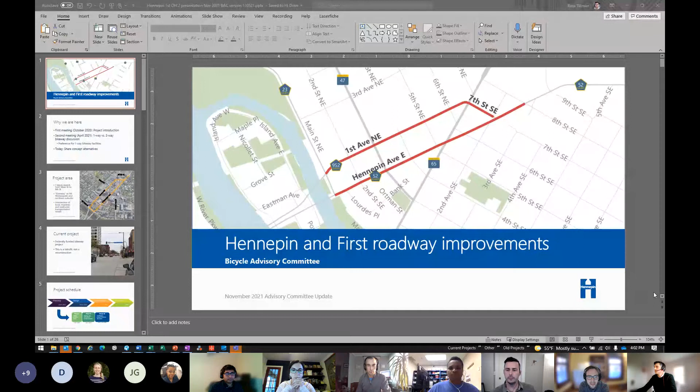Good evening, everyone. My name is Luke Hansen, Transportation Planner with Minneapolis Public Works. We're here tonight with a presentation on the Hennepin First Roadway Improvement Project, led by Hennepin County. We'll be presenting information on a couple of corridor concepts at the 15%-ish range. We're not requesting a formal resolution, but are open to one, should the group have a preference or opinion they'd wish to articulate. With respect to time, I'll hand things over to Josh, who joined from the county.

Thanks, Luke. Good afternoon, everyone. My name is Josh Potter, Transportation Project Manager with Hennepin County, county lead for this Hennepin and First Roadway Improvements Project. I'll kick it off to the Bolton and Menk team here. Ross, why don't you go ahead? Good afternoon, everybody. My name is Ross Tillman with Bolton and Menk, and with me I've got Cody Christensen with Bolton and Menk, as well as Colin Harris with Alta Planning and Design.

Appreciate the time, everybody. I know we've got a tight agenda and a ton of information to share, so I'm going to try to blast through the slides. I know everybody has seen some concepts in advance, so we're looking forward to some conversation afterwards too.

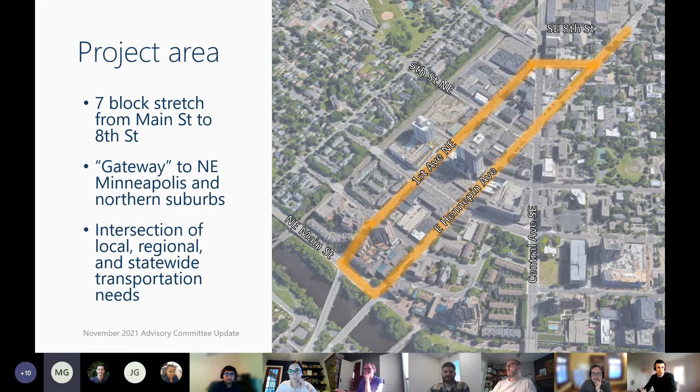Project area, you've seen this slide before, primarily on Hennepin Avenue and First Avenue Northeast between Main Street and 8th Street. This is a little different than before: we added the orange line on Main Street between First and Hennepin. That's where the seam trail connection through the park board is going to be integrated with this project. We've got a slide on that later too.

Just a reminder, the current project is a federally funded bikeway project. The scope was adding a bikeway, replacing signals, ADA upgrades, and curb extensions where feasible as the base scope. This is a retrofit project, not a reconstruction, so for the most part in the concepts you're going to see us trying to save as much infrastructure as we possibly can to fit in the bikeway and make some of these other improvements as well.

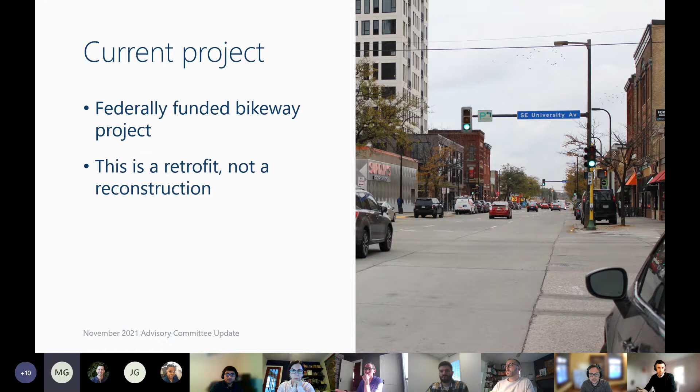Schedule-wise, construction for this project changed from 2023 to 2024. That's now in line with when the E-Line BRT will be implemented through this area. Otherwise, we're currently in phase 2 of our planning effort, sharing concepts. We plan to be back with this group and others in early 2022 with a preferred alternative.

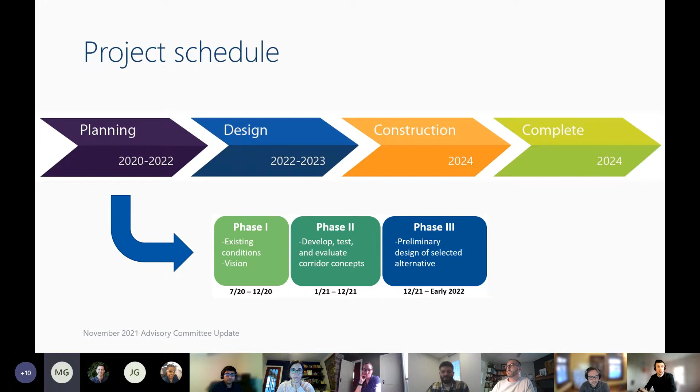Refreshing on project goals, the things we're focusing in on here are really safety and accessibility, multimodal connectivity, supporting land use context of the area and the business district, and then of course active living and environmental health, the bikeway component.

We have a slew of engagement opportunities that we've done so far and that we plan to do as part of this project. We're in the second round of engagement, meeting with advisory committees and neighborhood groups. We have a public open house next week, similar to what we did in the fall and winter of last year. We're getting input on the concepts now, and we plan to come back in early 2022 with that preferred alternative to talk through.

Key things we've heard to date: safety and accessibility, active living and walkability, serving planned growth in the area, and streetscape and public realm improvements are important to people. Of course, the business district and supporting that is important in this area, and then parking needs. So those are the very summarized versions of what we've heard throughout the engagement we've been through to date.

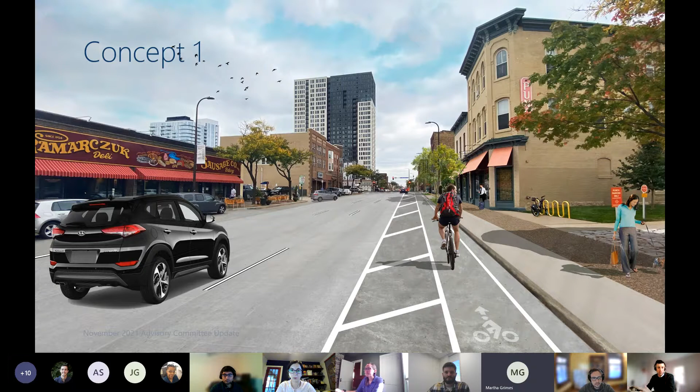Again, this is pretty much in line with what the federal grant had in it, so we wanted to make sure we took that idea and got it on paper in a way that was feasible. This is just a rendering of what that could look like: the three general purpose travel lanes and then the on-street buffered bikeway with the paint buffer.

The second concept is a variation of that, where we're actually repurposing the 3rd travel lane on the road. This concept has 2 general purpose travel lanes, and the right lane becomes a transit lane. There remains 1 parking lane on the left side of each roadway, and 1 protected bike lane taking the place of the parking on the right side. There are a couple instances where that's not the case in the concepts you'll see on the layouts, but for the most part parking is removed on the right.

Each of these concepts does include the seam connection. This is an identified gap in the regional trail network that the park board identified through their planning process. The gap is between First Avenue and Hennepin on Main Street. The idea here is to repurpose - since that's a pretty wide section right now on Main Street - a portion of the shoulder and through lane for the southbound direction to put in a shared use path between First and Hennepin.

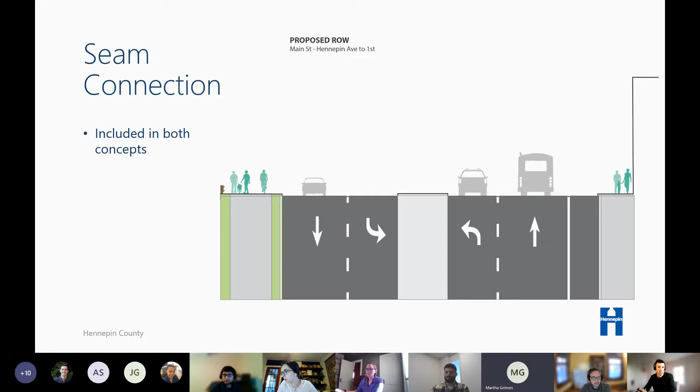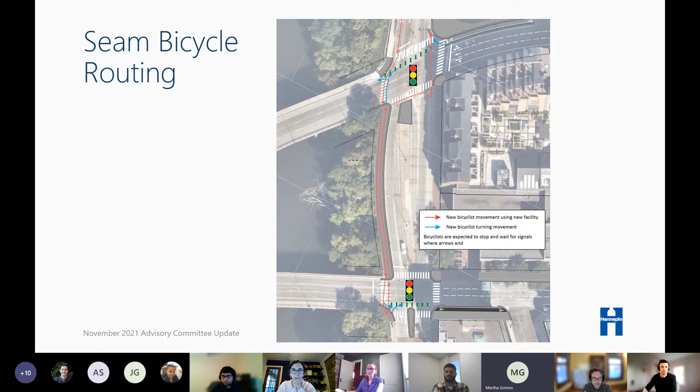Another key piece to these concepts is what we're looking to do at the triangle. The triangle is the intersection of Hennepin, Central, and Fifth. This is included in both concept 1 and concept 2.

As many of you know, this intersection is pretty complex right now. It's hard to know where everyone's going. It's a mix of vehicle, pedestrian, and bicycle traffic, and it's complicated to understand where people may be coming from when you're crossing. Some of these crosswalks are long. If you're walking through the area, the refuge in the middle of all three roadways is a very small island that you can get stuck on, which isn't comfortable.

This also is a bottleneck for traffic in the area. Most importantly, this is one of the most unsafe intersections between the corridors, so a lot of crashes have occurred here in the past. We really looked for a way to improve this area.

The idea that the team came up with was to essentially separate Fifth Street for vehicle traffic. So if you're in a vehicle driving on Fifth Street, you can no longer drive through Central and Hennepin on Fifth. You'd be rerouted around the area to get to your destination. If you're walking or biking, you would still be able to traverse along the Fifth Street alignment through what we're calling the triangle area, or the little peninsula that juts out from the Henson development.

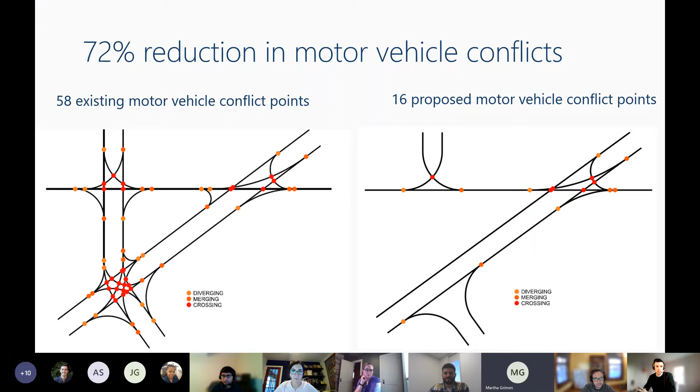Additional information on the safety component: looking at a couple different versions of conflict points. This one's vehicle conflict, so there's a humongous reduction in motor vehicle conflict points, which should correspond with a reduction in crashes—58 conflict points down to 16 with this concept installed. On the pedestrian side, that's a 40% reduction, so 35 down to 21. Depending on how you're using the facility on a bike, it might be more in line with one or the other, depending on where you're actually riding.

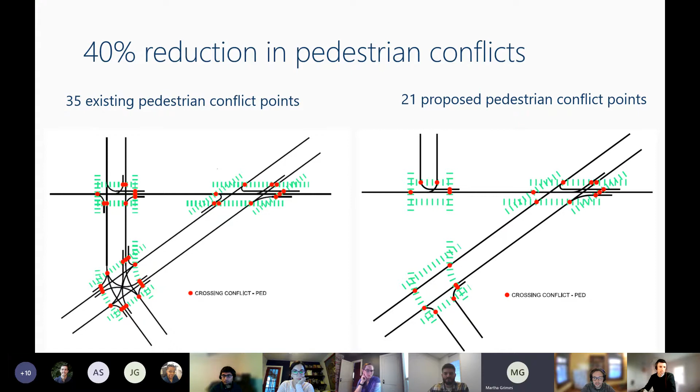So humongous safety benefits as a potential here with doing this fix.

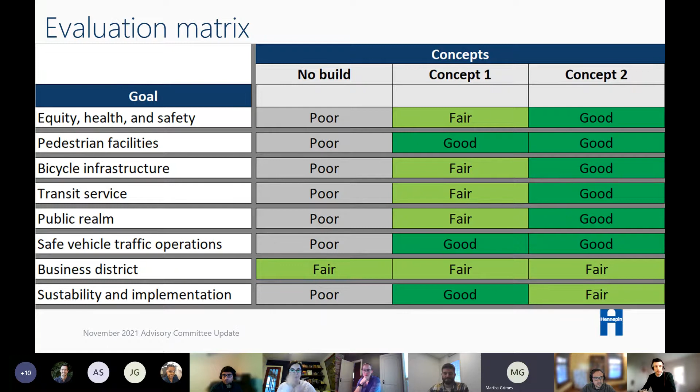We did, like I said, summarize the concepts on a scale of poor, fair, and good as we're comparing all the concepts to one another using those 8 goals I mentioned. Generally speaking, I know we're short on time—concept 2 tends to fare better than concept 1 when you compare those. Concept 1 tends to compare better to no build, as you're adding infrastructure for bicyclists and improving things for other modes as well.

Remaining decisions, of course, we're trying to get feedback from everybody here on a lot of things. Bikeway type being one of them—we showed the buffered bikeway versus a protected bikeway on street. Transit lane incorporation, streetscape priorities. We do have images for green infrastructure, but at this point no actual locations are identified for that yet; that's something being worked on right now. Coordination with other projects in the area and which project is going to do what, and of course the on-street parking impacts.

Next steps: we have an online listening session, the big public open house next Wednesday the 17th, from 6 to 8. Everyone's welcome to join. More information will be shared during that meeting. We have a longer time for design refinement based on input we receive, more targeted outreach with stakeholders, and then a project update in early 2022 where we'd bring back the preferred alternative for more input.

So with that, any questions? I realize that was very fast, trying to get through it as quick as I could. You did a great job with it.

Are there any questions? I'm looking for hands. All right, I see Deanna. Yeah, can you tell me again what the two different bikeway type choices are? I can, I'll show you too.

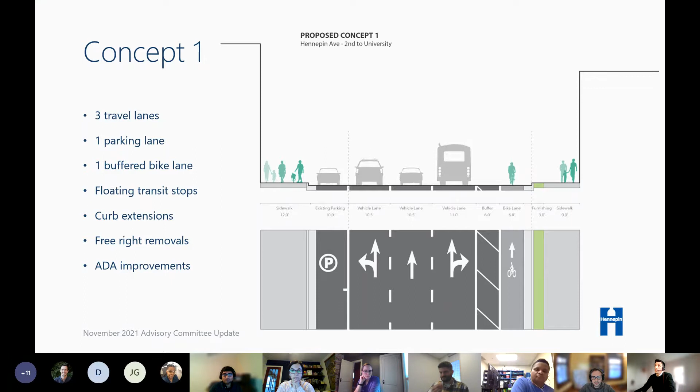Concept one was an on-street buffered bike lane - a 6-foot bike lane with a 6-foot buffer. Concept two is an on-street protected bike lane - a 5-foot buffer with a raised concrete curb separation, protecting the bikeway from traffic.

Okay, all right. I have a different perspective on the raised concrete than the rest of the team, so I'm not going to comment. You sure? All right. Yeah, I am. Okay, I see Jesse.

One of the questions I want to ask is about the bike lane dimensions shown on the concept layouts and sections - are those dimensions exclusive of the gutter pan area, or do they include that? They do not include the gutter pan area. Correct, Cody? That is correct. Okay, thanks.

Okay, anyone else? Aaron. Hey, yeah, I actually don't really have a question, I just wanted to compliment the team on concept 2. I think that is fantastic. The transit lane plus the protected bicycle lane, I think will make a huge difference in the area.

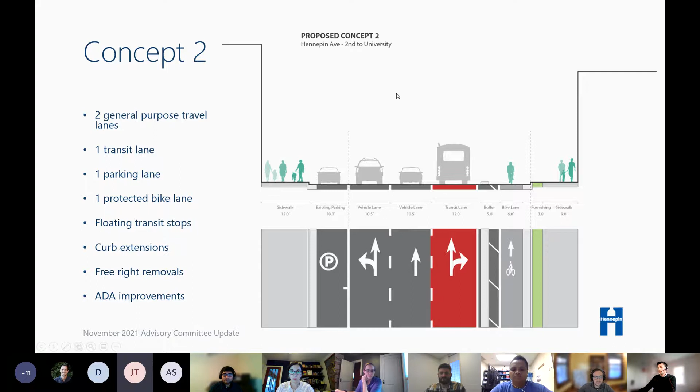And it looks like when you get to the other side, on the receiving side of Hennepin, it makes it so, because it's a through-left, you're shifting the lanes of traffic and having to do new curb work. I was wondering why there would have to be a through-left on the west leg, and it couldn't just be a left turn lane.

I think I'm understanding - so in concept 2, we've got the transit lane on the right, and we need 2 through lanes to get everyone else through. So that left lane can be shared as a shared through-left. With the concept shown on the screen here, that was meant to provide space, I believe, for the bikeway on the right-hand side of the road. Cody, you can jump in too if I'm missing a point here.

Yeah, I think what you have shown in this picture is our concept 2, so that would be the transit lane. We needed a spot for that transit lane to terminate, so the best option would be getting them through the Central intersection, and then they would merge back in with traffic, call it the east side of Central. As Ross mentioned, we need those 2 through vehicular movements through that intersection, which is why that extra curb work is needed on the north side. Concept 1, I believe, would have the 2 right lanes as through lanes, and the left lane would be left-only, and the curb work would not be needed.

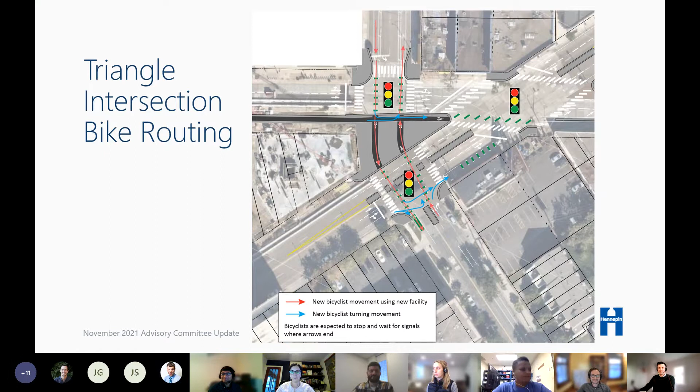We're going to be doing the 53rd Avenue North Bikeway layout, 30 to 60%. Is Jasmine here? Jasmine, I'm here. All right, are you ready to rock and roll? I am. Thank you, and let me just share my screen.

Hello everyone, again my name is Jasmine Hadjic-Stanek. I am a transportation planner in Public Works, and I am here as a follow-up. I was initially in front of this committee several months ago, I believe it was summer, to present on this project at 0%. Now we are back to show you 30 to 60%. As a brief recap of what we talked about back in June, this project, the 53rd Avenue North Bikeway, located in North Minneapolis, Ward 4, is a 2022 project which is part of a street resurfacing. Public Works plans to resurface 1.2 miles between Penn Avenue North and Lyndale Avenue North, for those of you who are familiar with this area.

This is actually a border street between the City of Minneapolis and Brooklyn Center. And as a lot of you know, Minneapolis Public Works has a standard practice that with our mill and overlays or resurfacing projects, we like to leverage our resources and implement a bikeway connection as identified in our city's 10-year transportation action plan, the All Ages and Abilities Network. So looking at our All Ages and Abilities Network, this segment of 53rd is identified as a long-term low-stress bikeway, meaning that down the road it would become low-stress, but for now it would serve as a connector, really connecting folks who are biking between Penn Avenue here, which connects the Shingle Creek Parkway and the North Mississippi Regional Park.

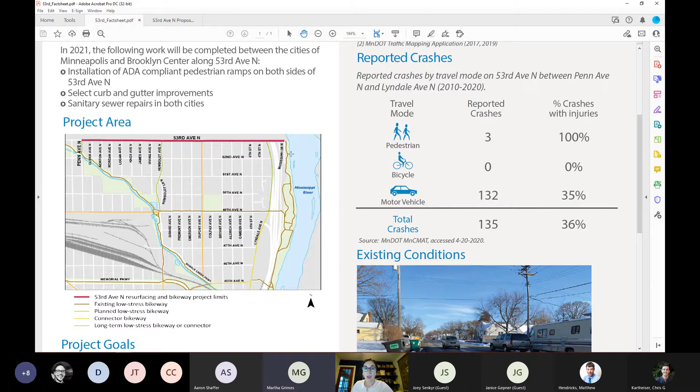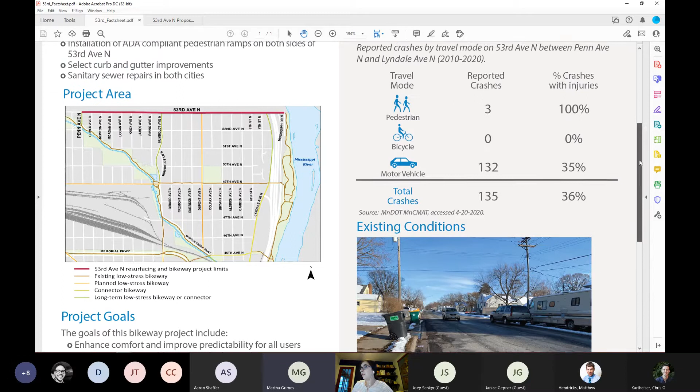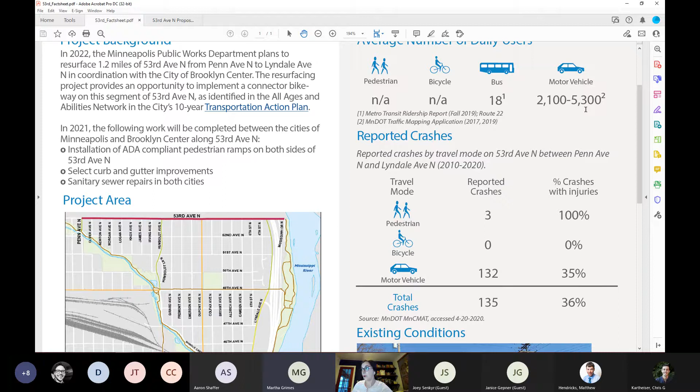Some of our goals, really by leveraging our resources, we want to enhance safety on this roadway. Right now 53rd Avenue North has around 135 reported crashes, which is fairly high for a street that has somewhere between 2,100 and 5,300 vehicles per day. 3 of those reported crashes are pedestrian with minor or possible injury, 0 bicycle crashes, and 132 motor vehicle crashes. A large number of these were rear end type of crashes, with one being a head-on.

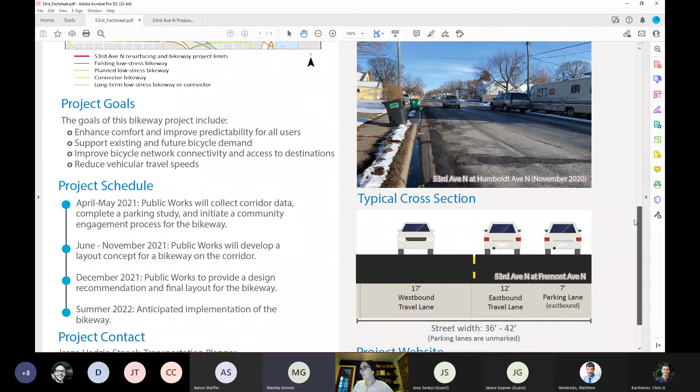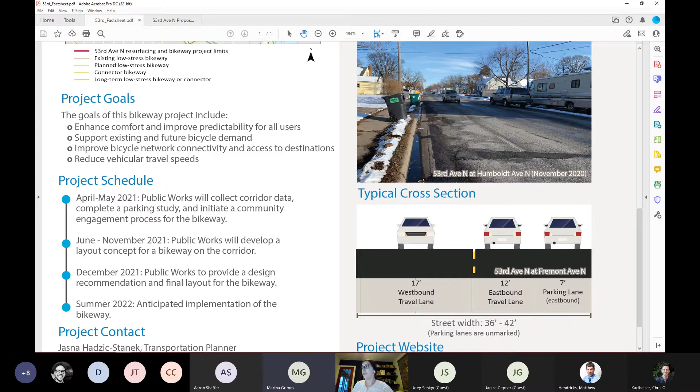Much of 53rd is a fairly wide road. For those of you who live or travel this area, right now we have anywhere from 36 feet to 42, in some cases 44 feet, with unmarked parking lanes in some areas. So you have around 17 feet just for one driving lane. Currently, because of all the potholes, cars are going a little slower, but there's a concern that once this is resurfaced, this wide road will become even more of a getaway or cut through for vehicles who are speeding.

So with that in mind, some of the data we looked at—a parking study, and some of the initial engagement that we did with this group and neighborhood organizations—we developed a design concept, which I want to walk you through. Let me just back up over here.

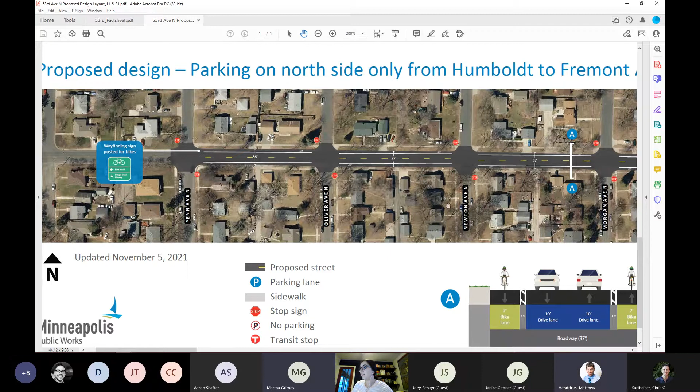I'm going to start at Penn Avenue here. This is where I believe this committee recommended that we should have signage pointing down to Shingle Creek, even though it's just 1 block south. So this is where our project would start. What we're proposing on this side is striping standard bike lanes, so you would have 10-foot driving lanes in each direction with a 1.5 to 2 foot buffer, and then a 6.5 to 7 foot bicycle lane.

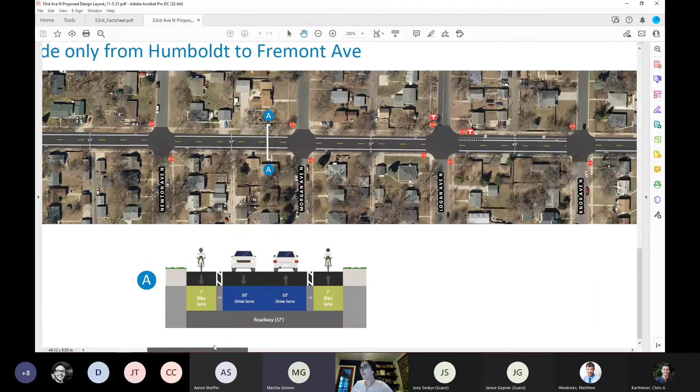The reason this concept is being proposed is because this area, the west end of 53rd, has much lower traffic vehicle counts. The street almost ends over here at Russell—it dead ends to a park. Also we have several transit stops that would really impact a different type of facility.

So this would carry all the way through to Humboldt Avenue North, which is actually where we would transition to a two-way bollard protected bikeway facility, which would include again 10-foot lanes, a 3-foot buffer, and then at a minimum a 12-foot two-way bikeway facility, and in some cases more than that, because the street varies a lot. We would retain parking on these 2 blocks to again narrow visually that street.

We have a transitional bike box here that would help the westbound bicyclist carry forward so they can continue west onto these bike lanes. So this would carry on towards the east end. We have another typical section here.

This is a 12-foot lane that would include 2 feet on curb and gutter, a 10-foot lane, and again your 12-foot two-way bikeway facility. We did have a conflict with one of the transit stops that the buses had southbound on Bryant. Initially the bus stop used to be here on 53rd, but in order to implement a two-way bikeway facility, we are proposing that we move that bus stop around the corner there, and we will work with those residents to notify them of that change.

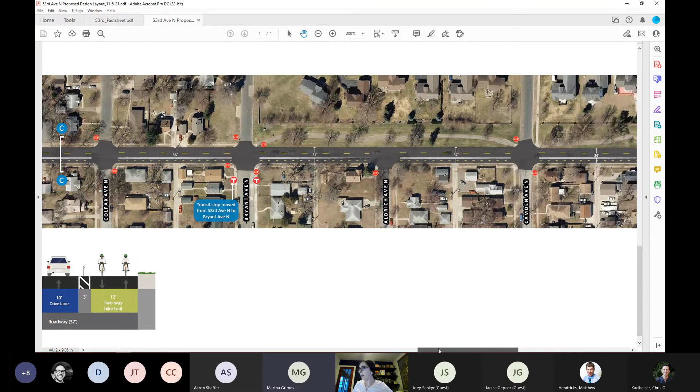And again this would continue now here when we get to the most eastern end, where we see wider sections between 52 feet and 46. So our plan would be to continue the bollard protected two-way bikeway facility and connect here to the Mississippi River Trail, and also just add a shoulder here on the bridge to again visually narrow that.

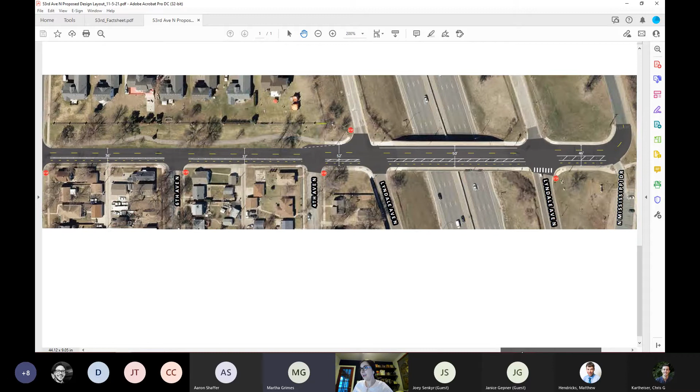Thank you, Jasna. Oh, Matthew. I just had a quick question. Real quick. Oh, sorry, go ahead. Oh yeah, sorry, okay, I'll go.

Just real quick, I want to gush about my coworker Jasna here—she sort of drove this effort. We were totally planning on doing standard bike lanes. She heard from a lot of people that they wanted something better, and it became a little bit harder of a project. So I just want you all to know, this upgrade is all Jasna doing this, where we typically wouldn't have done that. Just wanted to share that. And I want to thank Matthew. I'd like to thank you too, because I live over that way. So I know, I love it.

All right, do we have anyone with questions? Yeah, this is Adrienne, I have my hand raised. Go ahead. I was curious if you could talk a little bit about why going with bollards instead of a protected curb bikeway.

Initially we were just looking at doing standard bike lanes. If you look at the history of how we implement these connector bikeways with resurfacing projects, which don't come with a lot of money, these are quick fixes we can do now using striping and signage. This is not a reconstruction, it doesn't involve funding that would cover permanent installation, such as curb or putting the bikeway at curb level with a sidewalk. So this is really us trying to think how we can more creatively provide a more protected facility using the limited funding allocated for this project. That's where the bollards were the best we could get in this scenario.

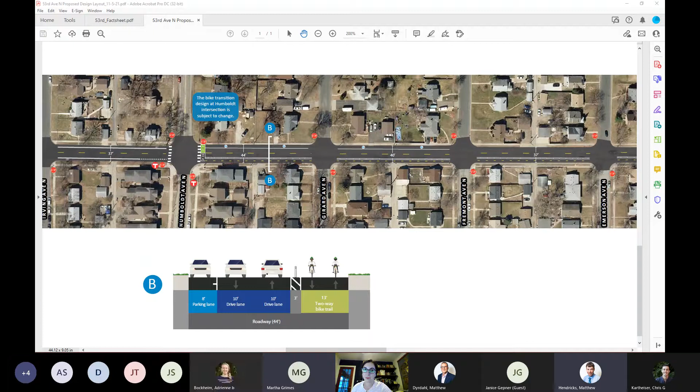Great, thank you for explaining that. Matthew, did you have your hand still up? Yes, thank you. I noticed there's a significant amount of traffic here, and it's a key connector. But I wonder if closer to the western side of the facility there'd be an opportunity to add a diverter somewhere so you'd get a little bit of traffic reduction. Maybe that's beyond the scope of this project, but it seemed like there's enough traffic volume to maybe warrant something like that.

Do you have an example of where the city has done that? Yeah, I'm thinking of neighborhoods where they use diagonal diverters to minimize through traffic, like maybe at Newton or Oliver. If I may, could I jump in? I think part of it, Matthew, is that this is a state aid route, and we don't typically do the vertical bollard diverters on that. I don't know that we could in the same way as the neighborhood greenway on 16th Ave North or 24th Street. So it's a good question, but we don't typically do that on a state aid route like this.

Okay, thank you. Any other questions? Jasna, what did you need from us? Do you need a resolution or?

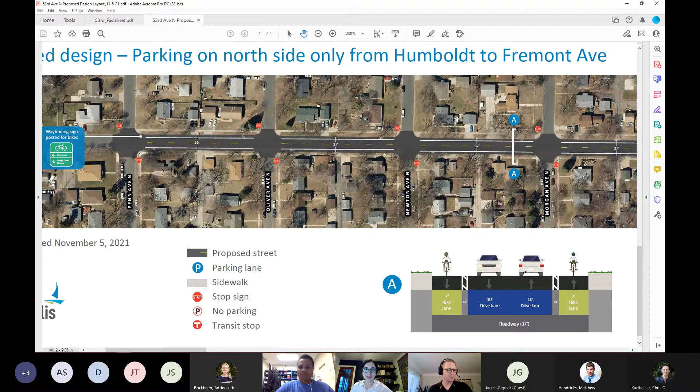Are there any other questions? Thank you, Jasmine, and thank you for helping my neighborhood. Thank you, see you at the Lynn Bohanna neighborhood meeting. All right, see you there.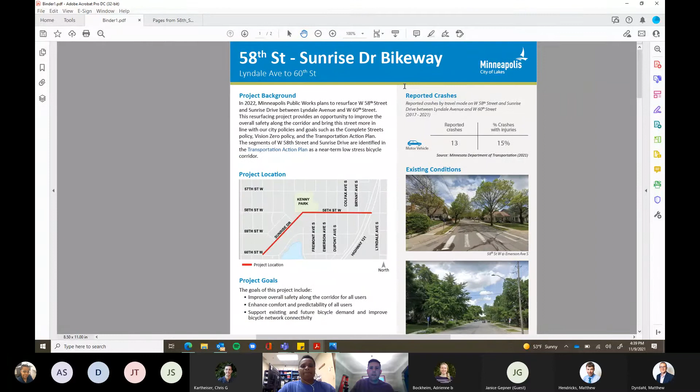Thanks for having me back. I was here a handful of months ago to introduce this project for 58th and Sunrise. This is actually the same type of project that Yasna was just talking through with you, also a mill and overlay. This will be implemented in 2022. So what we're looking at is signing, some striping, and bollards. Our limits are from 60th Street, the full length of Sunrise, and then a portion of 58th from Sunrise over to Highway 121, that is the mill and overlay.

We'll see here that I'll show a section of roadway between Aldrich and crossing over Highway 121 with some striping changes. That portion is not scheduled for mill and overlay, but we are exploring that for striping.

So just a recap of our goals for this project: improving overall safety along the corridor for all users. Right now we have pretty wide travel lanes and no bicycle facilities in this area. Currently on 58th and Sunrise we have connectors up to Bryant heading north, and on the eastern side of Highway 121 there's Lyndale heading south. We're looking to enhance the comfort and predictability of our users, especially bicyclists, and support our existing and future bicycle demands and improve network connectivity.

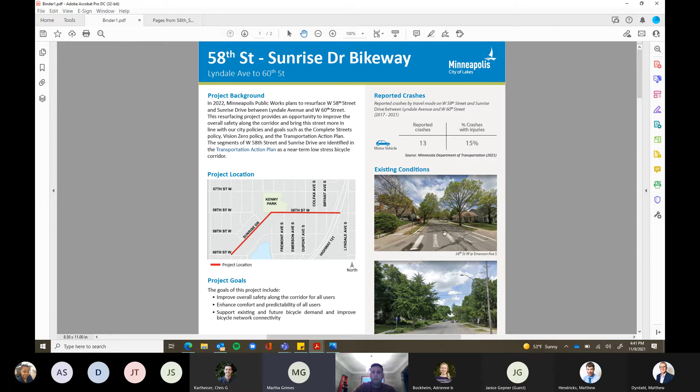You can see some existing conditions in these two photos. This top one is 58th Street, a pretty typical 36-foot wide roadway in our neighborhood connector. You can see there's a bus stop here, so there is transit service along this corridor. However, it is suspended currently due to the pandemic. It's Route 156, but Metro Transit has noted they will be bringing service back to this corridor.

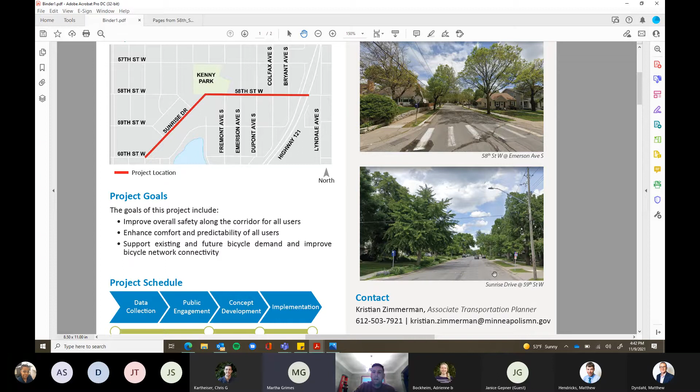On Sunrise, the roadway significantly changes. It's 44 feet, so an additional 8 feet, still with transit service on either side of the road. There's street parking on either side currently, and two travel lanes.

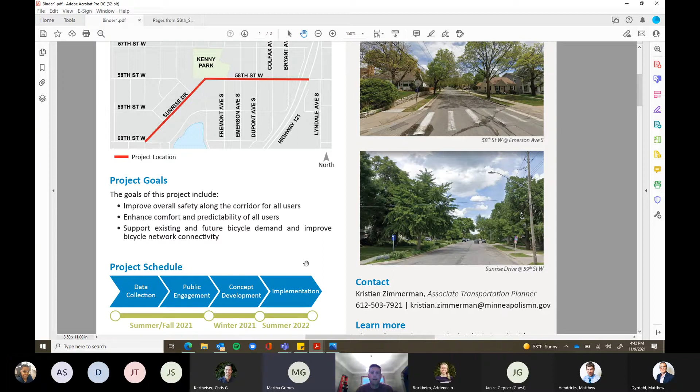As for the project schedule, we've gone through the data collection portion and are still working through public engagement. Earlier in the fall we went to Kenny Elementary and connected with quite a few families at their back-to-school event.

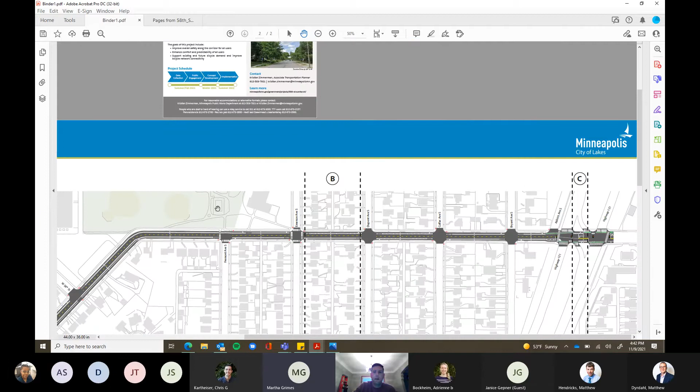With that, I'm going to spend a fair bit of time going through the layout for this project. As you can see, it's about 0.7 miles of roadway being resurfaced and striped. I'll start here at 60th and Sunrise.

For Sunrise Drive, the design doesn't change—it stays the same throughout the corridor. On the left-hand side we have a transit stop at this corner with no stop mechanism, so we're dashing the bike lane with the buffer at the bus stop. Other than that, it would be a 6-foot bike lane with a 2-foot buffer.

We're looking to bollard-protect the lane. We do have driveways throughout the corridor, so we'll need to leave those open to keep access. On the eastern side of the street, we looked at floating the parking to protect bicyclists as much as we could. However, there are too many driveways and conflicts on this corridor, which would make for a really inconsistent design, creating a lot of striping, signage, and maintenance issues, plus sight triangle problems for people leaving their driveways.

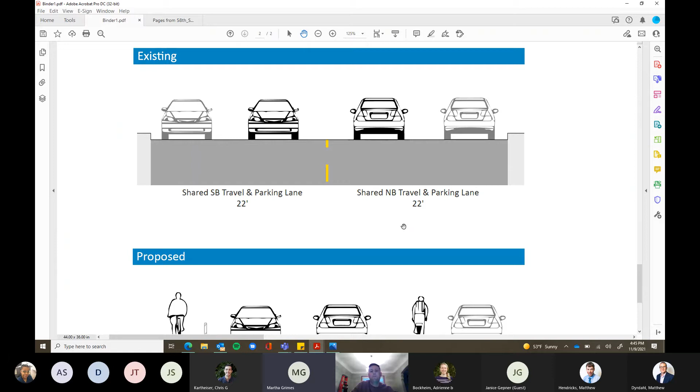So I'll come down here so we can see the existing versus proposed layout. Existing, we have a shared travel and parking lane, 22 feet on either side of the roadway. Proposed, that space is reallocated with a bike lane, 2-foot buffer with bollard protection, and travel lanes at 10 feet. You can see the parking lane against the curb and the bike lane adjacent to the travel lane.

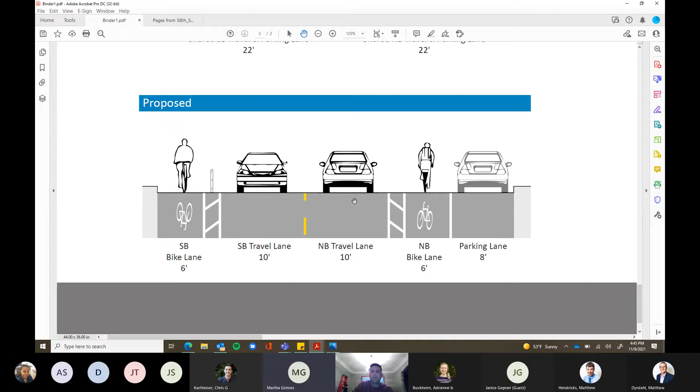This design stays throughout Sunrise—there's really no changes. We have a couple of bus stops that interrupt it, but it's a pretty typical design.

We have a slight variation here at the corner, where the parking would end on Sunrise. We will not have parking on 58th. Currently, parking is permitted on the south side of 58th, but through parking studies we found it was fairly minimally utilized. So the bike lane would come through, with 6-foot bike lanes again. We would be able to bollard-protect all along 58th and provide 10-foot travel lanes.

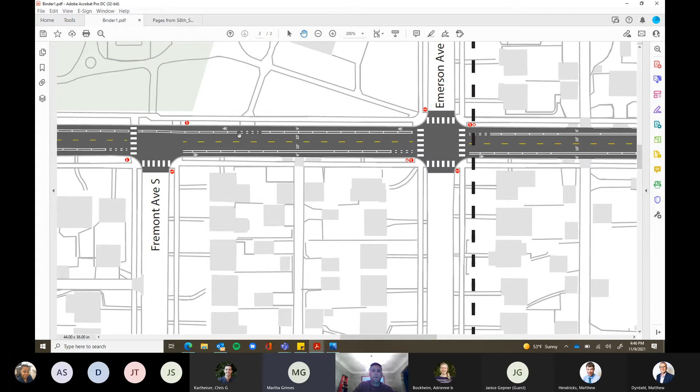Currently we have some marked crosswalks here, getting students to Kenny Elementary and into the park—those would remain. We have a transfer spot for the school that we would keep, just dashing through there. On Emerson, we would continue to keep all four striping lines as an entrance to the elementary.

So the design really doesn't change at all on 58th, it just continues for all of the blocks. The mill and overlay will stop approximately here at Aldrich. This portion through here on 58th, tying in with Highway 121, isn't scheduled for mill and overlay, but we wanted to do some striping because we recognize the importance of getting users coming along 58th to connect to Lyndale, which goes south.

Currently on Highway 121, we have a 4-lane layout with a through travel lane and a left lane, duplicated on the south side. We looked at this as an opportunity to greatly change the layout and protect bicyclists through this intersection, since there are a lot of movements and intersecting conflict points. We worked with other divisions to determine if there was a need for a designated left turn lane taking you north onto Highway 121, and concluded we could suffice with traffic coming through and remove that, giving more space and protection to bicyclists.

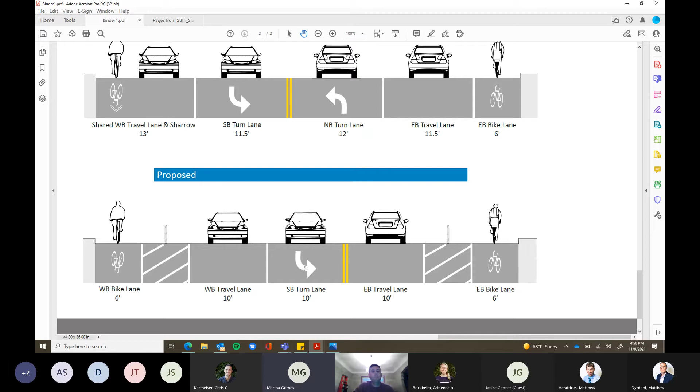So our proposal is to designate bike lanes on either side, with buffer and bollard protection where possible, one travel lane heading eastbound, removing the northbound turn lane, and continuing to have the westbound travel lane and the southbound travel turn lane. I know that's quite a bit of information and a lot of changes at that intersection, so I'll open it up for comments and questions.

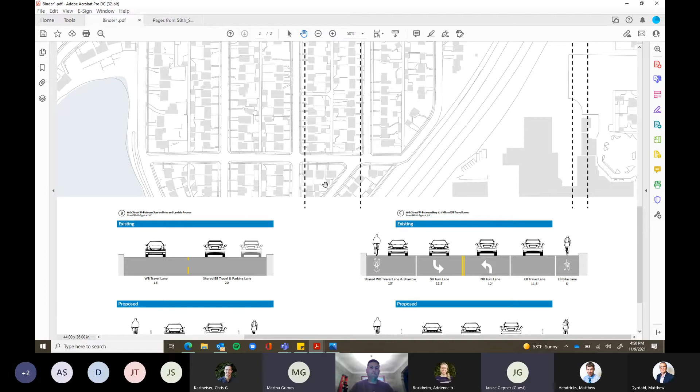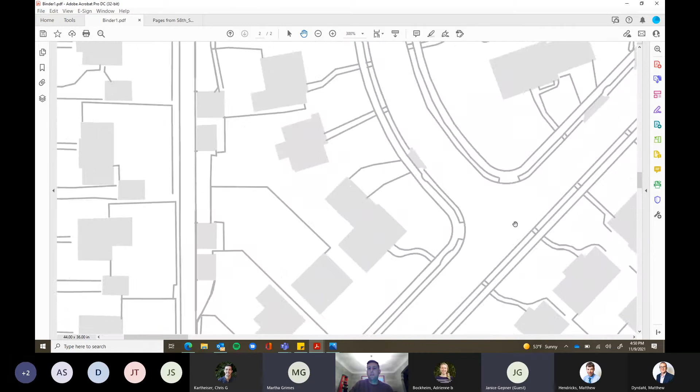Thanks, Kristian. Janice: I just wanted to clarify — on the Sunrise part, it looked like there was a bit of protection, just not bollards, a buffer but not bollards. Is that right, or was it just a double stripe? Kristian: On Sunrise, one side where we don't have parking will have a buffer with bollard protection. On the other side, it'll have parking, so it'll just be a buffer with no bollard protection. Janice: But it will still be a buffer as opposed to just a single stripe? Kristian: Correct.

Anyone else? I'm not seeing any hands.

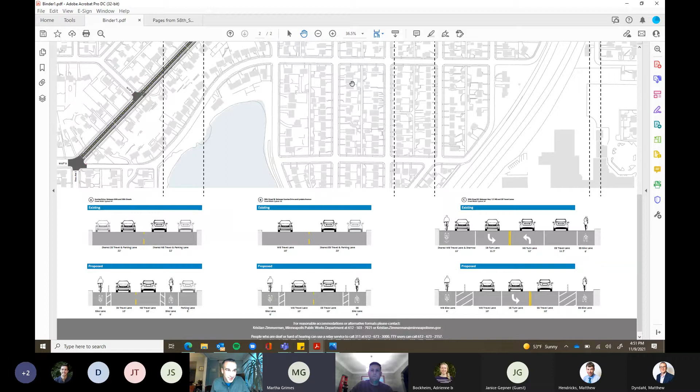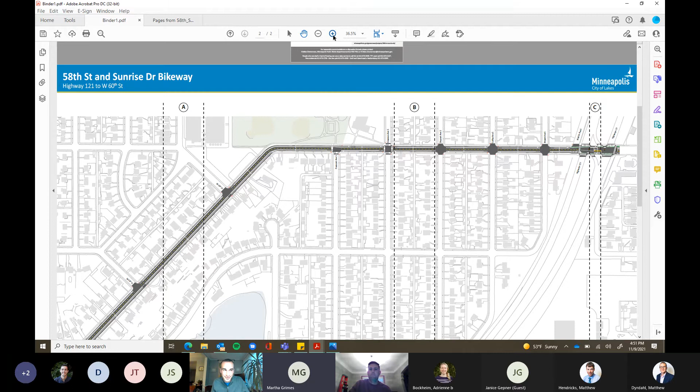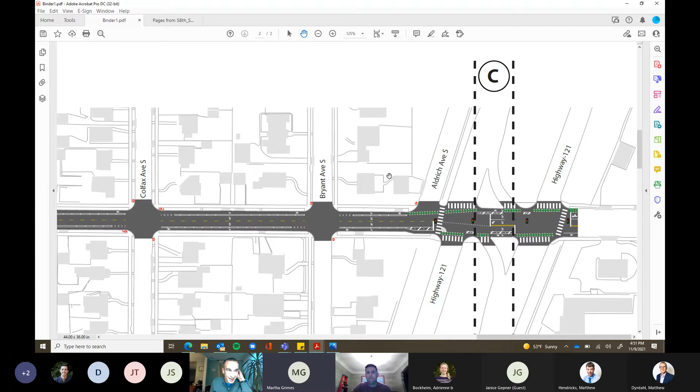I wanted to chime in on the future of that 121 intersection — I think you all did a good job given the limitations of resurfacing versus reconstruction. I remember from a few months ago there were some ownership issues too, where it's managed by somebody other than the city. So given the monstrosity of that intersection, I think this looks good. I've been trying to picture how it would feel biking, and I think I might be afraid to do it as it is now, but maybe would try it with this layout, which I think is a big improvement.

Appreciate that. Janice, is your hand still up?

Janice? No, sorry, I lowered my hand.

I guess I would just ask the same question about whether he would like support. Should we just say we support the project as presented, if that would be helpful? Is that helpful, Kristian? Yeah, that would be helpful. All right, it sounds like we have a plan.

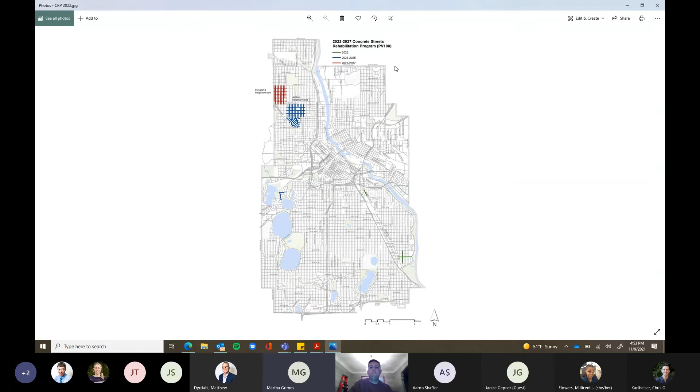So I'm leading concrete rehab for 2022. This is our rehabilitation program. We have a couple corridors that we're looking at. Sorry, kind of zooming in here.

So in 2022, we are looking at concrete streets of Minnehaha Avenue from Franklin down to 24th Street. That has a bikeway currently on it. And then we're looking at 44th Street from Minnehaha over to Edmund/the Parkway, essentially. There's no bike facility on that portion. And then we're also looking at 42nd Avenue, which goes from 42nd Street down to 46th Street. There's no bikeway on that portion either. But the portion that we do have...

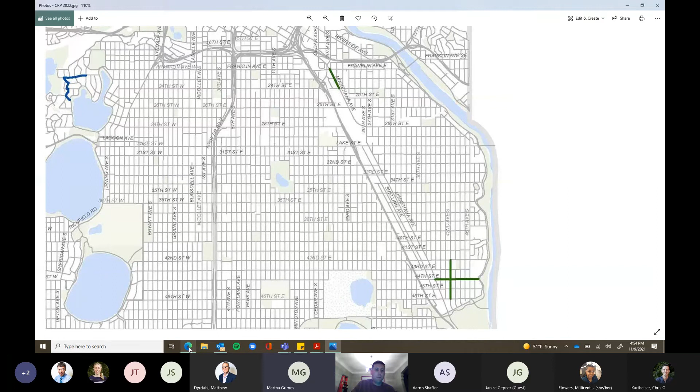So just kind of do a little bit of a Google Street View for you. We're looking at two intersections that could potentially have some significant impacts and changes just from a geometry standpoint, and that is Minnehaha and Franklin. Franklin underwent some changes with the county a few years ago. They did a little bit of work here at this intersection, did some ADA work, but we're looking to come through and identify panels that need replaced. And then within that, we're looking at our opportunities for changing any kind of roadway geometry that maybe doesn't fit our goals as a city, and maybe some safety benefits that we could provide. Also looking at some green infrastructure, so we can do some greening and also stormwater management.

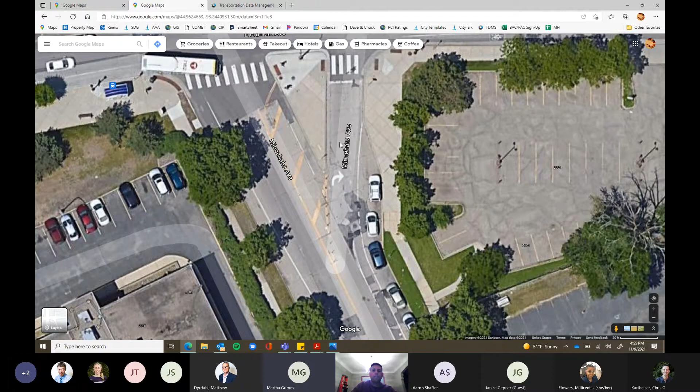So here currently, we have kind of somewhat of a slip lane here for the right-hand turn. We have kind of the travel lane, one travel lane heading south from Franklin. There's been some striping changes a little bit here.

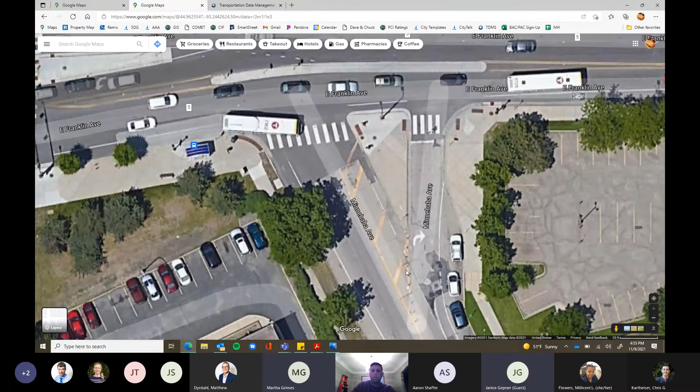They're used to... Kristen, do you realize you're not sharing your screen? Oh my gosh, so sorry. Sorry, I thought that was... Okay, it's working for me, actually. Oh, it was? So it might be different, I could see it. Users. Yeah, I could too. Okay, sorry, I don't know what happened to me. Well, I apologize for those of you that it wasn't, but I'm glad it was for most of you.

So anyhow, just kind of looking at this intersection and how we can redesign this, make it safer for pedestrians and bicyclists, motorists, how they'll come through. So we're working through kind of what those designs can be. We'll be going out to the neighborhood and working through our standard process of going through different committees and in the neighborhoods and council members to let them know of this process. So we're in the early stages right now. We're just identifying what panels need replaced and looking at the significant changes for intersections. So this is a high priority for us at this particular intersection for a redesign.

And our other intersection is actually very close. This one here at Minnehaha and 21st, you can also see there's quite a bit of asphalt on the ground where just the roadway is in poor condition. This one has some pretty big geometry issues of just how 21st and Minnehaha connect. There's been a little bit of work here with just some bollards that have come in to try and change up that geometry somewhat.

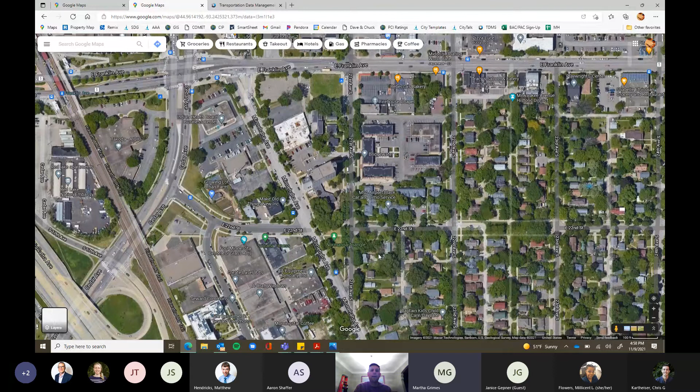So, these are the two intersections that I think would interest the BAC the most on this project. With that, that's just a high level introduction. Just wanted to get that in front of you all to make you aware of what we're looking at. I'll come back to this group when we have some designs to put in front of you to see where we're heading.

Thanks for the heads up, appreciate that. Any comments? I am not seeing... oh, I see a hand. Hey, it's me, Aaron. Go ahead, Aaron.

I just wanted to say this looks like a good thing. I work at a nonprofit with an office at Cedar, just a block north of that Minnehaha intersection with Franklin, near Cedar and north of that Taco Bell. We also have another office on 27th Avenue, so I hop between those two. That slip lane on Minnehaha, combined with how close it is to Cedar and how wide Cedar is, definitely makes it feel pretty dangerous.

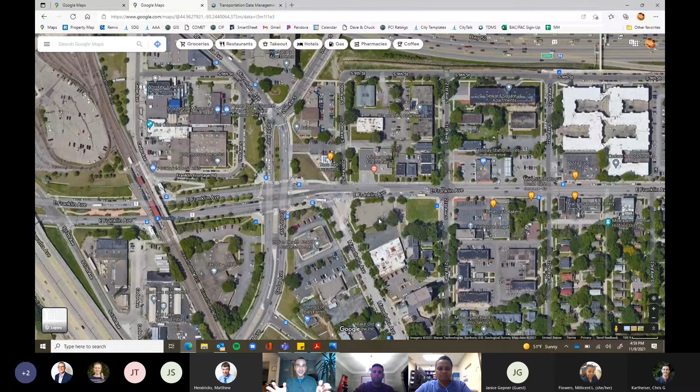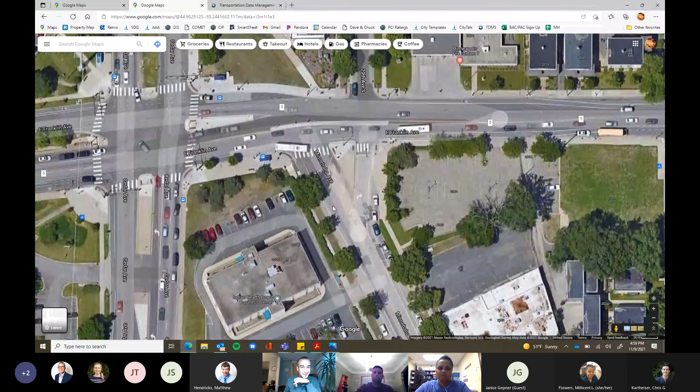I think your team will look at this, but just putting it out there that doing anything we can to squeeze that intersection, and swinging that northwest facing tip more to be due north or north-south so it's more teed up with that intersection, will make a huge difference. I haven't interacted much with 21st Avenue, but looking at it on Google Maps, it looks very frightening to cross if you're on the east side of Minnehaha trying to cross 21st Avenue. It looks like it's about 100 feet wide.

So definitely just teeing up some of those will make a huge difference. I'm sure that's what you all are probably going to do, but I thought I would put that out there. Yeah, definitely, there's quite a bit of opportunity to just align users better, create shorter crossing distances, and protect our most vulnerable users of the street.

So, Kristen, do you know when you're going to be coming back? Can you give us a ballpark? I don't have a date in mind, but it'll be mid to late winter probably. Okay, alright. Anyone else with questions or comments? Okay, I'm not seeing any. Thank you for sharing, and thank you for giving us a heads up on that. We look forward to seeing you mid-winter.

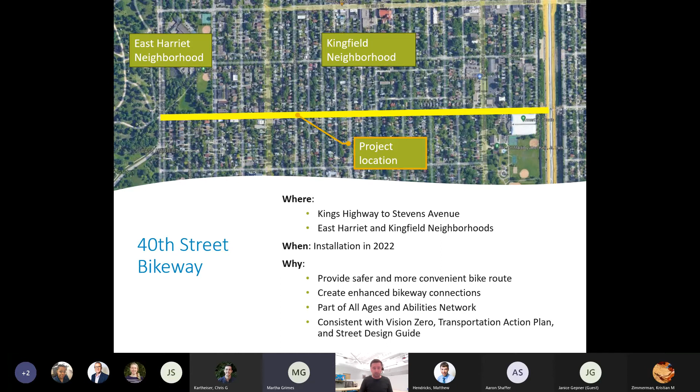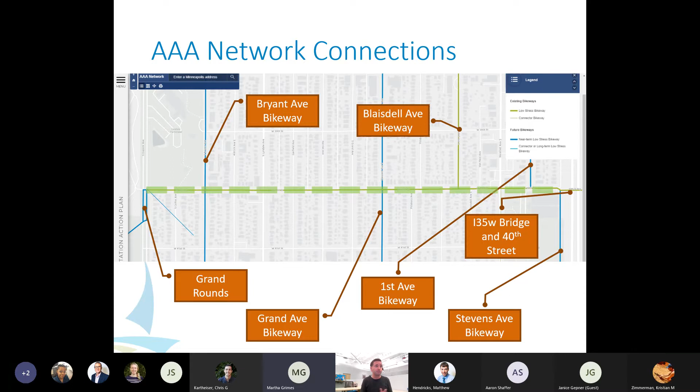So this is a very ugly map, and I apologize for that, but the point is just to illustrate that this is a critical east-west connection, and it really does link together a ton of stuff in the area. All of the north-south bikeways, with a short connection that gets you to the Grand Rounds and around the lakes. So it's a really important link in the AAA network.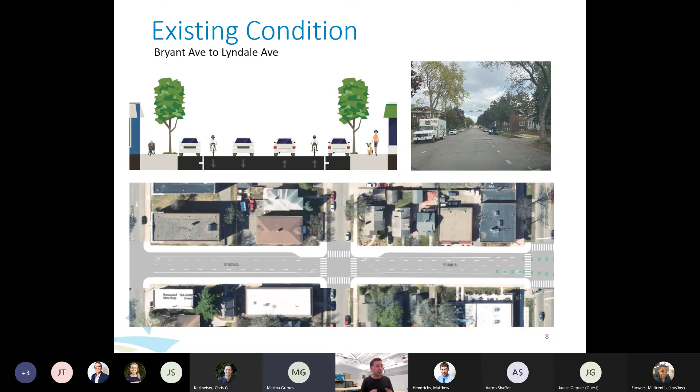There is an exception, and that exception is a 2-block stretch. It unfortunately happens to be a business node, but it's the area between Bryant and Lyndale. In this area today, there is parking on both sides of the street, and under the proposed concept, we would lose one side of the street parking. So it's about 19 spaces in order to be able to have that continuous facility through on the south side of the road.

So this is just more cross sections. This is very similar to the first one that I showed, but I think you can kind of see the concept proposed here, and we can talk more details in the discussion if people have questions.

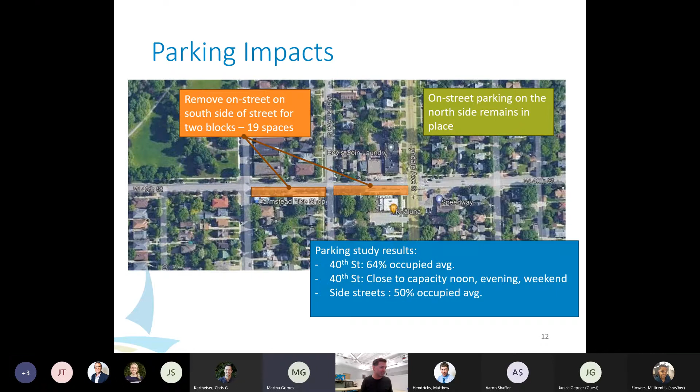So there are some parking impacts. I did mention that we did do a parking study and are working with the businesses and the local stakeholders to have those conversations. But generally, the proposal calls for losing about 19 parking spaces on a 2-block stretch.

So timeline, this project is slated to be installed in summer, probably the July or August timeframe, as part of that seal coat project that I talked about. In terms of process, we are doing some community engagement now, meeting with neighbors, businesses, that kind of thing. And the idea is to have the design finalized by about the end of the year.

And then this would go through the council in a to-the-record approval process, which means it's not like capital projects where you have the layout and you have the 0, 10, 30, 90. This is a little bit different. It still is considered by council, but it's a little bit different process.

What that means is I wouldn't necessarily come back to this group unless there was interest. I certainly could. But we will move forward with the design as shown and working through the stakeholder engagement process. So if there were no major changes or issues with what we have, we would continue through, have it approved by about the end of the year, work through engineering in the winter, and be ready to install this thing in the summer.

So that was quick, kind of threw a lot at you there, but I'll stop there. And please, if there are any questions, comments, concerns, I would like to hear them now. Okay, well, thank you. I see a hand, Aaron.

Yeah, this one is one I'm very excited about. So thank you, Dan. I live just a few blocks south of 40th in Kingfield. So a couple of kind of questions and one comment. Or two, I guess one question, two comments. So one question I have is just on that western edge near Bryant, looking at your proposed layout there.

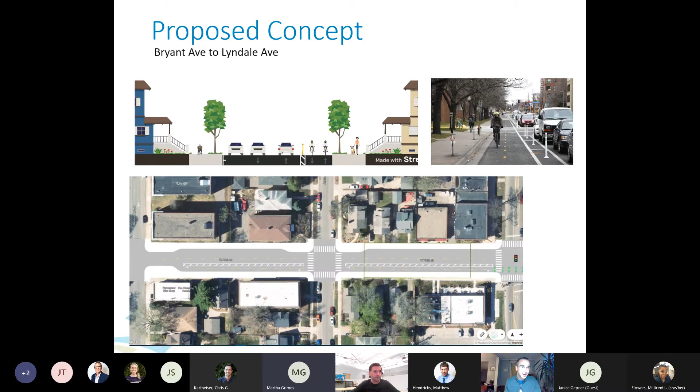Cool. And then I guess one of the two comments is that, currently, as you've probably noticed, the bike lanes that exist already, that are just the single paint ones, end at Lyndale. If you're traveling westbound, suddenly you find yourself with nothing.

And so I think these two blocks—I don't know what neighbor opposition might end up being—but those are going to be super key to making this a usable bikeway. I imagine we're ready to hear some negativity toward it, but hopefully it can stick with it and not loosen the rules on that one.

The other comment I had was, if you look back over closer to Nicollet, one thing to really be concerned about in terms of what we're protecting the bike lane with is there's a car wash on the north side at Nicollet and 40th. What I see pretty much daily is 1 to 2 cars frequently blocking the existing bike lane to dry off their car or do whatever it is you do after a car wash. Maybe we can come up with a more firm way of blocking that off. I know there's no curb work plan, but maybe there can be something more substantial, maybe taller bollards or just something more intimidating to keep people out.

Sorry, can I ask a follow-up question—the car wash is on the north side, and when you see the cars blocking the bike lane, is that both sides of the street? So they'll pull into the bike lane on the south side? For some reason it's more frequently the south side—must be the way they pull out of there, it's just the convenient layover I guess. Yeah, and I know there's spaces in the car wash for it, but maybe there's not enough, or maybe they forgot. I don't really know, but I'd say maybe it's 50-50 depending on when I'm going by it. If it's a busy car wash day, you're definitely probably going to see somebody there.

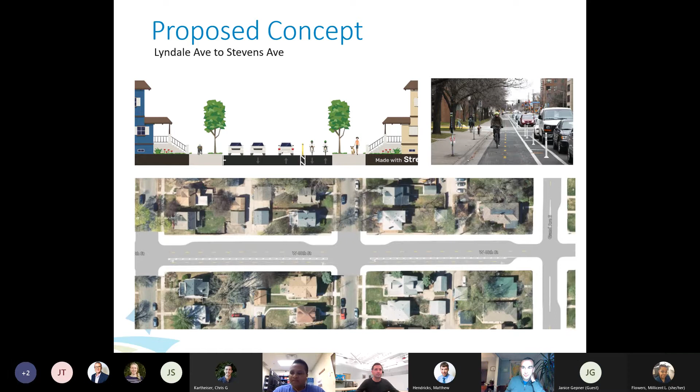Okay, I'm not seeing anyone else's hand. Dan, when will you be coming back? I won't, unless you needed me to for some reason. This all goes to the record process, and we go straight into design from here. All right, great, I don't see any more hands. Thank you so much for your presentation. Okay, thank you, group, I appreciate it. All right, have a great evening.

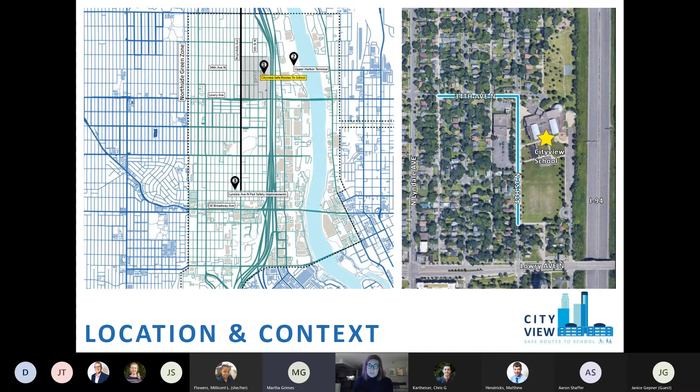If we take a few steps out, the Safe Routes to School project is put in place with a little more context. The gray shaded rectangle on the map on the left is what you see on the right, that Google street view image. The two projects located closest to the Cityview Safe Routes to School project are the Upper Harbor Terminal just east, and the pedestrian safety project along Lyndale Avenue North, just to the west.

Goals here of the project: making it safe, fun, and convenient for kids to get to and from school, enhancing the bicycle and pedestrian networks, integrating traffic calming elements that reduce vehicle speeds, and fulfilling the city goals for complete streets, Vision Zero, all ages and abilities bikeways, transportation equity, and climate action plans.

As for the networks located in the project area, there are a few key networks I'm considering as the project moves forward. The first is the bike and pedestrian networks laid out in the Transportation Action Plan, including the pedestrian priority network shown in blue, the future connector and long-term low-stress bikeway on North Lyndale Ave, and the future near-term low-stress bikeway on 4th Street North and 34th. That falls directly on top of the proposed route.

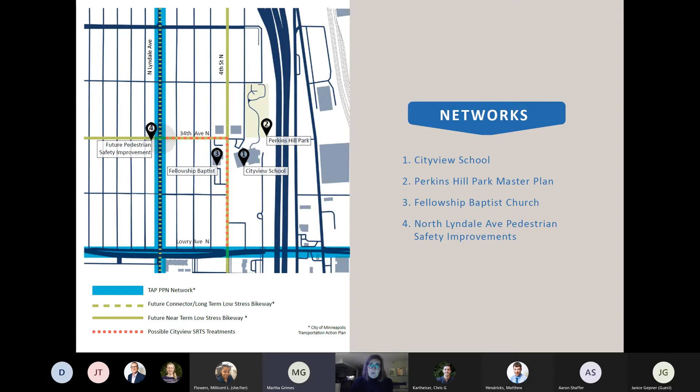Other things to note: there's a circle around number 4 at the Lyndale Ave intersection with 34th. That's a future intersection for a completely different project, so it's not an intersection we're considering for this project, but it will be a future site for pedestrian safety improvements.

As for route options, the proposed route is on the left. However, after doing some engagement, it's possible the treatments could extend further north on 4th or further west across Lyndale on 34th Avenue. Further engagement with Cityview staff, families, and residents will help make the final call on the final route. Both of these extensions seem like possible options that would help us achieve our goals, based on feedback from a couple of engagement efforts already done.

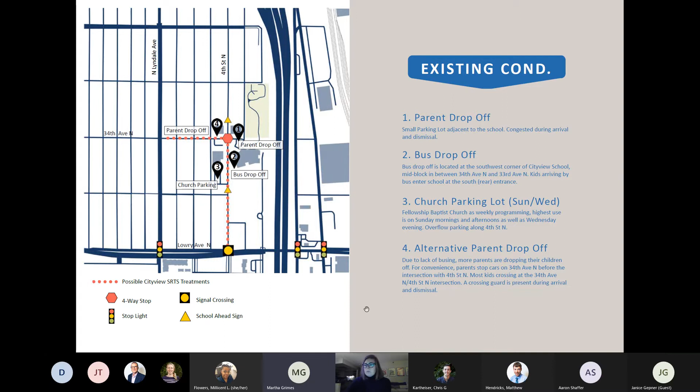As for existing conditions, there have been 2 engagement events as well as a site visit I did, and the results have been pretty similar: excessive speeding, increased parent drop-off, increased signage demand for alerting folks they're entering a school zone, the active church congregation and parking areas, and a demand for quick solutions.

This project will go out in 2023. But again, there has been so much speeding and reckless driving that folks have really been asking for quick solutions, be that quick-build treatments or temporary treatments.

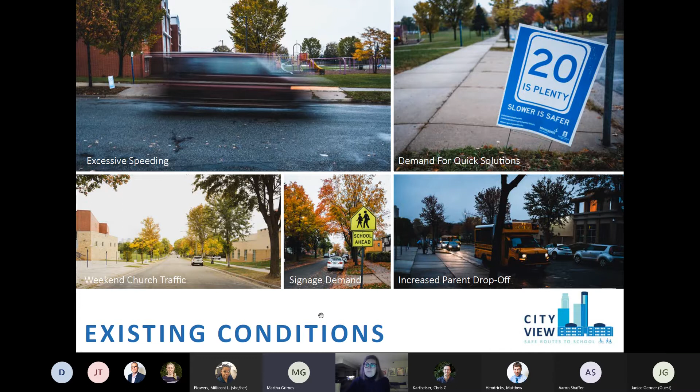This is an overview of just some of the engagement that's been done. This included a walk, bike, roll audit that took place in September, as well as some tabling at a City View School Parent-Teacher Conference. We received surveys from the walk, bike, roll audit, as well as in-person engagement with a map and a question sheet for the parents.

Again, the 3 priority issues to come out of that would be excessive speeding, especially along 4th Street North, which is a connector between the Dowling exit of I-94 and Lowry. Then highlighting school zone designation, there are 2 school-ahead signs on 4th Street. Folks would really like to see more signage or treatments that alert people they're entering a school zone.

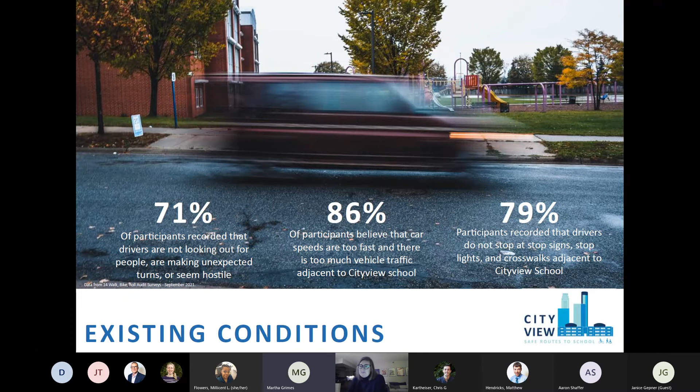And again, near-term solutions. These are some of the results from the surveys from the walk, bike, roll audit. I think, again, we're hearing the same stuff - speeding is a huge problem, especially on 4th Street.

Possible treatments include speed bumps, pedestrian medians, bump outs, bike boulevards, mini traffic circles, stop signs, also the possibility of a raised crossing - looking at the full suite of traffic calming with a huge focus on trying to figure out treatments that could really help minimize excessive speeding and reckless driving. And then possible options for quick builds or temporary treatments in spring or summer of next year or beyond.

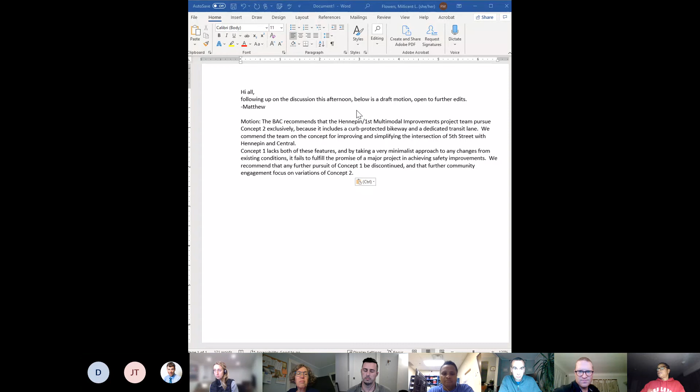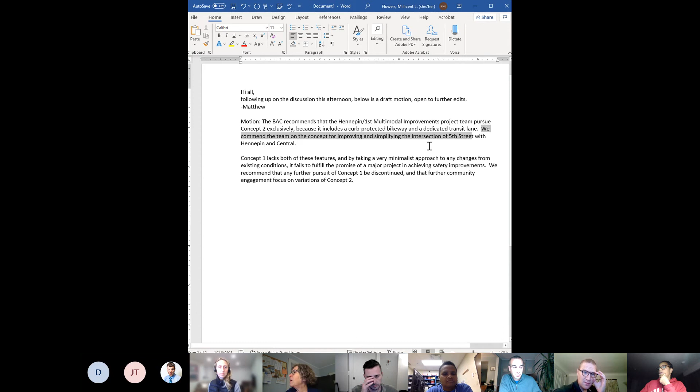I agree. All right, this is it right here. Okay, hey, since we're talking about this - so you want to move the 'we commend' sentence to the end? Yeah, and then change it to say we commend the team on their proposal for improving and simplifying the intersection. Yeah, perfect, say it again, Janice.

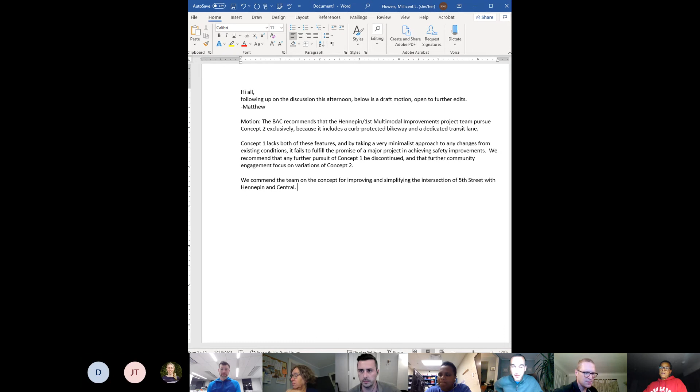I had a quick question, since we've got Matthew and Chris here, or maybe anyone else who remembers. I didn't recall, and wasn't able to find quickly during the presentation, how these new bikeways on 1st and Hennepin will interact with the bikeways on 4th and University. Do those continue? Does the protection on 4th and University continue through those?

I saw Jesse nodding - were you nodding because of the question, or do you know the answer? When I was looking at it, I was wondering why the protection wasn't continuing from 4th and University to Hennepin and First, or to First specifically, in between the two blocks. The concept they shared didn't show any sort of protection or even a bike lane at all in between the two blocks.

So that might be one thing we want to talk about - Fifth is obviously getting better, but Fourth and University still don't. Because these are one-way pairs, it's really good to have connectivity between the two of them, so specifically working toward improving that connectivity via Fourth and University would be helpful.

I think that would be a really good comment. I used to live over there and use that a lot, and that would be a really important connection. From my understanding, University and Fourth kind of have extra capacity on them for vehicle traffic, so I don't think there's too much of an issue with reducing that capacity via lane reduction. It's definitely worth having them explore a little further.